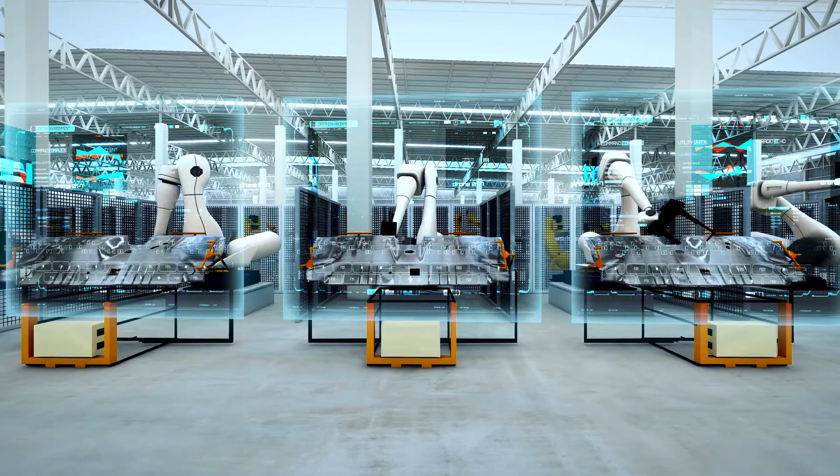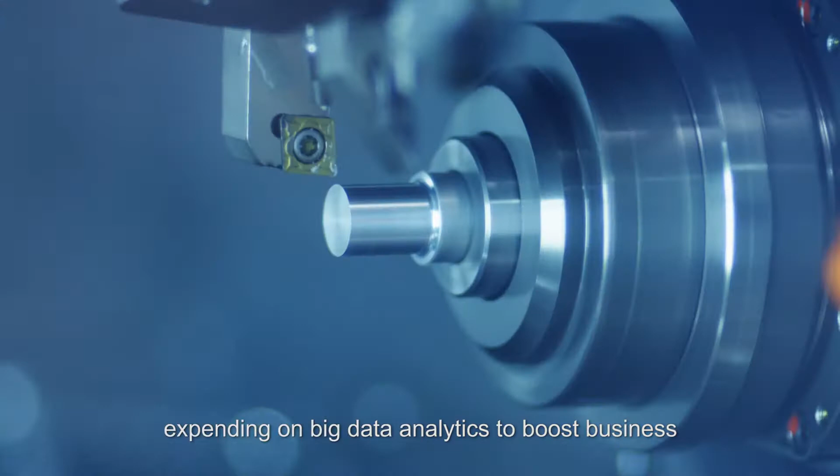Capturing factory production data through the cloud, utilizing predictive maintenance and instant error detection data to generate production models, expending on big data analytics to boost business through automatic adjustments to the production line, increasing yield rates and enabling energy optimization. Industry 4.0 is no longer a vision.

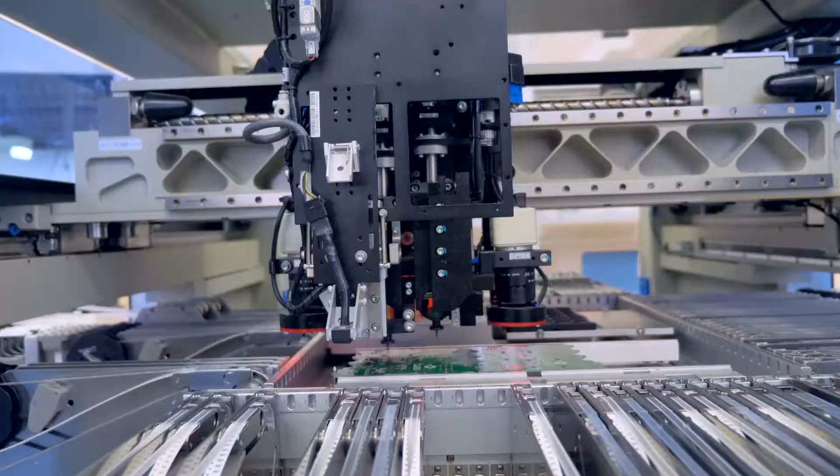It's already here, the new frontier for every tech firm. Committed to Industry 4.0, NEXCOM offers comprehensive solutions to capture data from robots, intelligent machines, and smart production lines. Collected data are aggregated at the edges for seamless integration with the cloud.

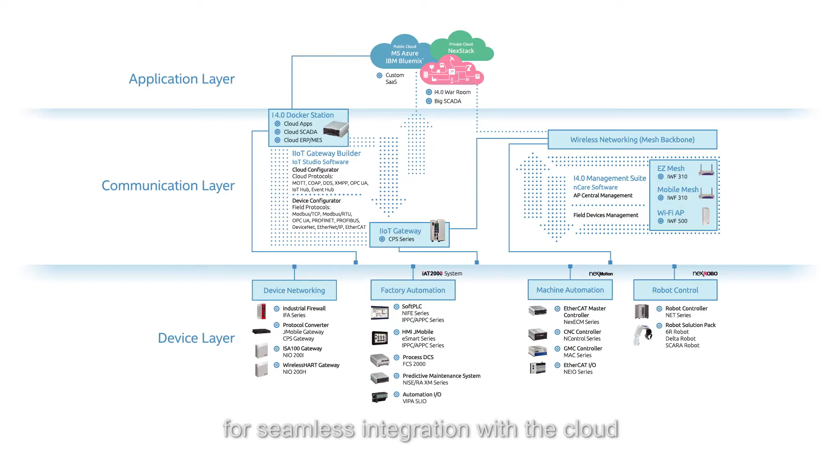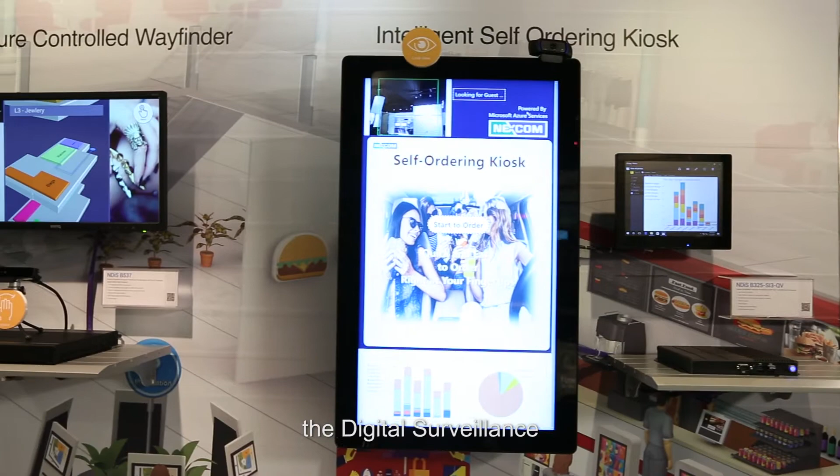NEXCOM was founded in 1992. Today, we have several business lines like the IoT automation solutions, the digital surveillance, the smart medical, the embedded platforms, the mobile computing, and last but not least, the network and communication solutions.

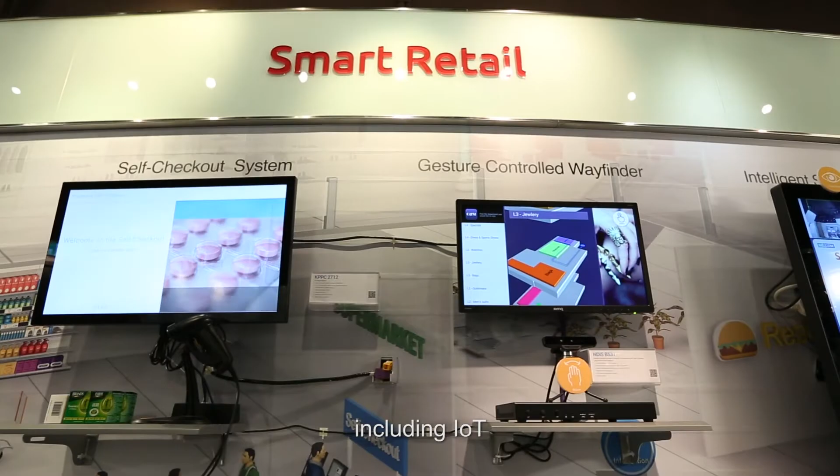All the hardware platforms are based on Intel architecture. Under the IoT megatrend, NEXCOM also expands the solutions to emerging applications including IoT, robot, connected cars, Industry 4.0, and industrial security.

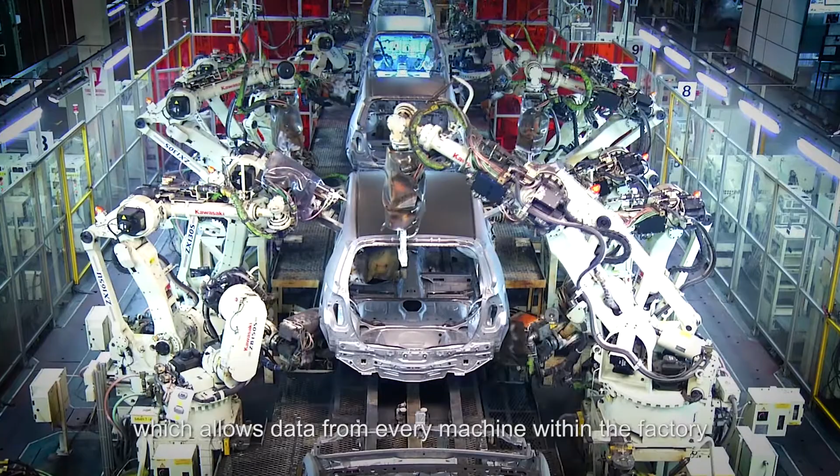The key factor to the success of any Industry 4.0 solution is the accessibility of Internet of Machine, which allows data from every machine within the factory to be collected.

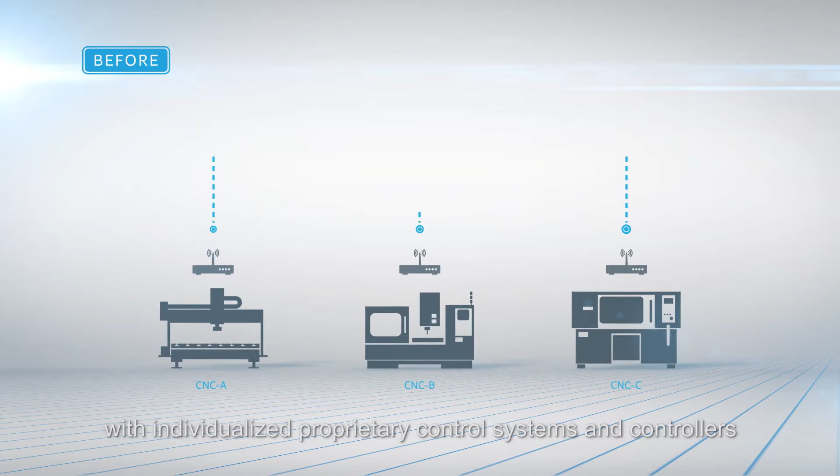In a traditional automated production line, machines vary in vendors, with individualized proprietary control systems and controllers. The differences in communication protocols prohibit direct communication between machines, making it difficult to capture equipment data and manage the system centrally.

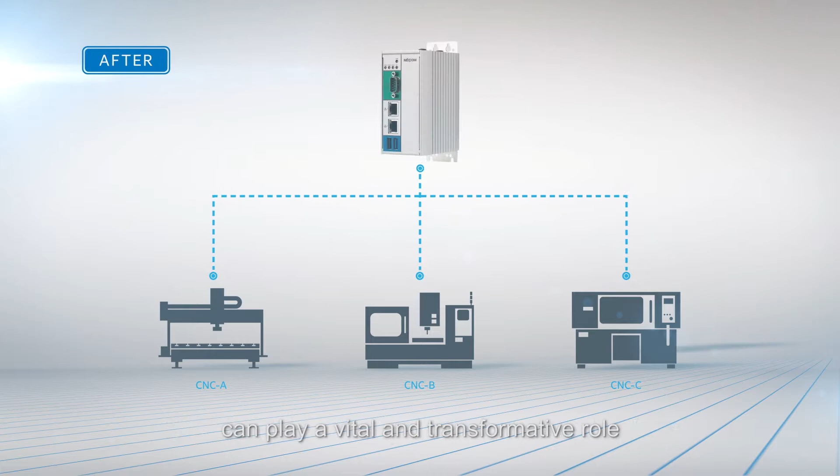For manufacturers seeking solutions to upgrade their production lines, NEXCOM's Ethernet-based EtherCAT technology can play a vital and transformative role. The smart gateways powered by Intel technology convert the languages of heterogeneous equipment into one common control language. This allows machines using different protocols to work in cohesion and effectively enhance production line efficiency.

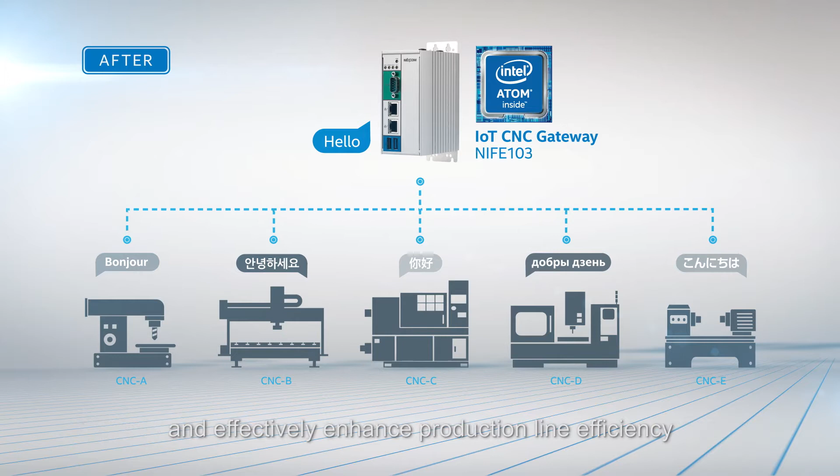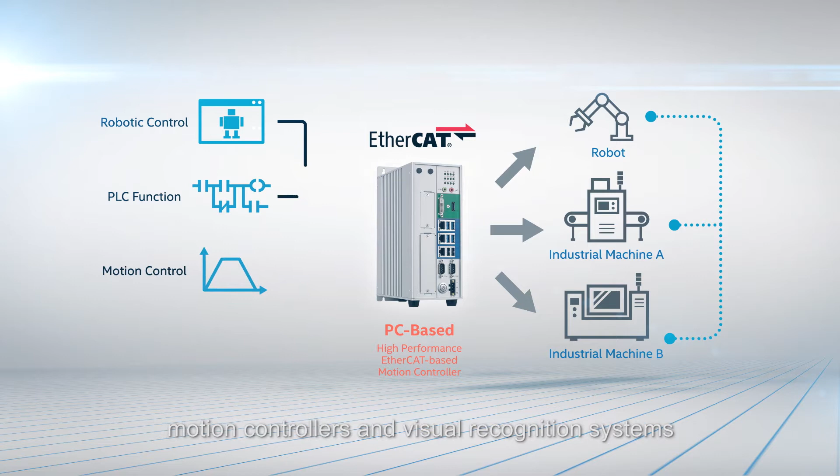For firms starting to build a smart production line from scratch, NEXCOM's highly flexible, PC-based smart controllers link and manage a wide range of equipment by integrating programming and data from robotic arms, programmable controllers, motion controllers, and visual recognition systems. This kind of advanced level integration is rare amongst controllers within the current market.

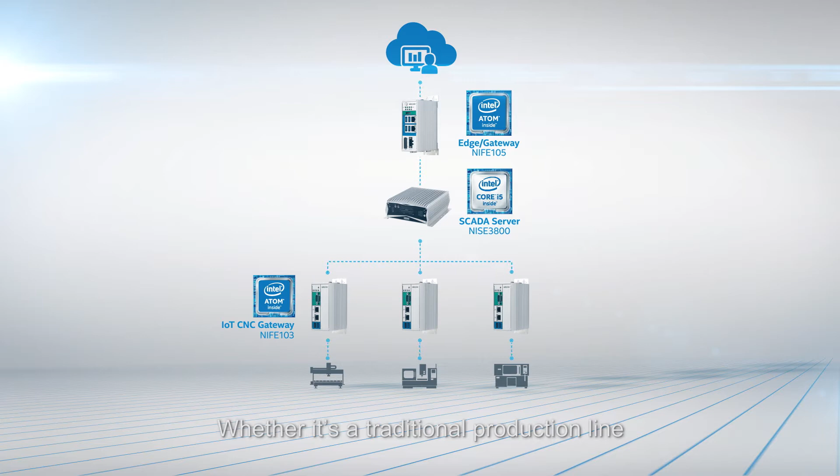Whether it's a traditional production line in dire need of upgrades or a newly implemented smart production line, you could always find the best solution at NEXCOM.

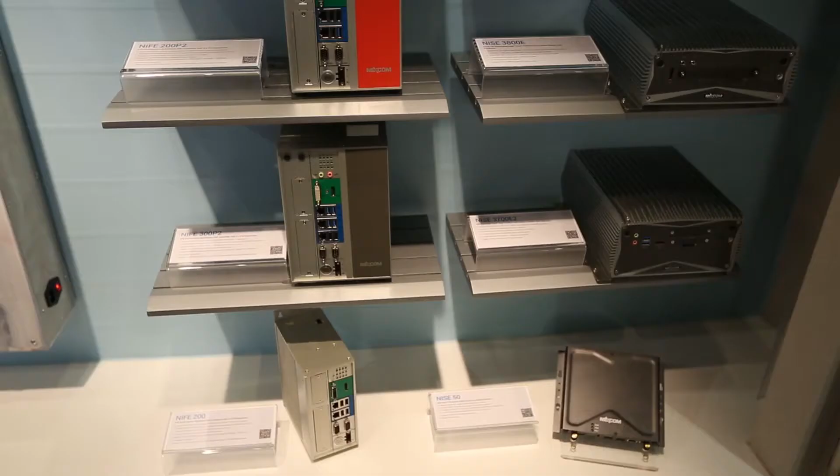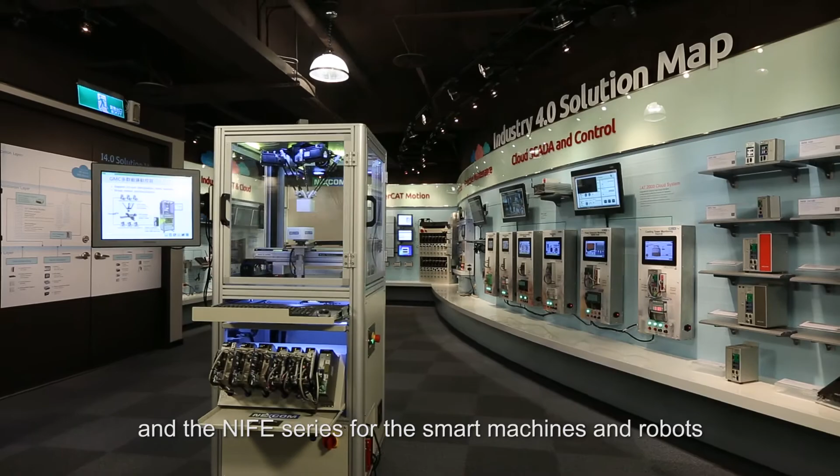We have several Intel Atom-based gateways like the NISE 50 and the Core i-based edge servers in the industrial IoT for best performance. We also have several Core i-based controllers like the NIFE 300 GMC and the NIFE series for smart machines and robots with real-time response.

All these systems are fan-less for ultra reliability. Intel processors are powerful, reliable, and energy efficient.

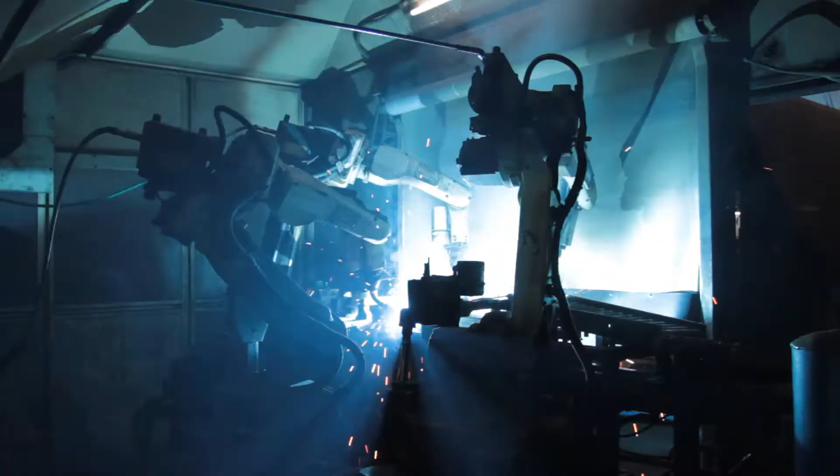Paired with NEXCOM's outstanding design and manufacturing capabilities, industry-leading gateways and controllers are created. In addition to being compliant with heavy industry regulations, they have a high level of tolerance to temperature changes, shocks, and interferences. Even in the most grueling manufacturing environments, they remain consistent and efficient to enable reliable Internet of Machines performance.

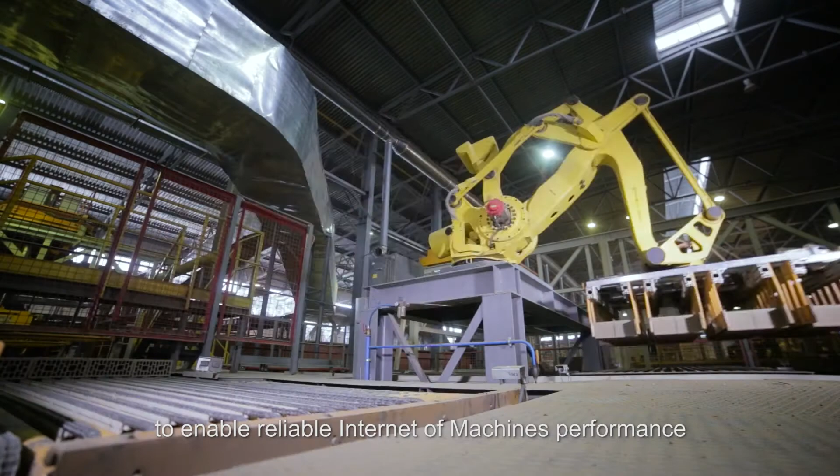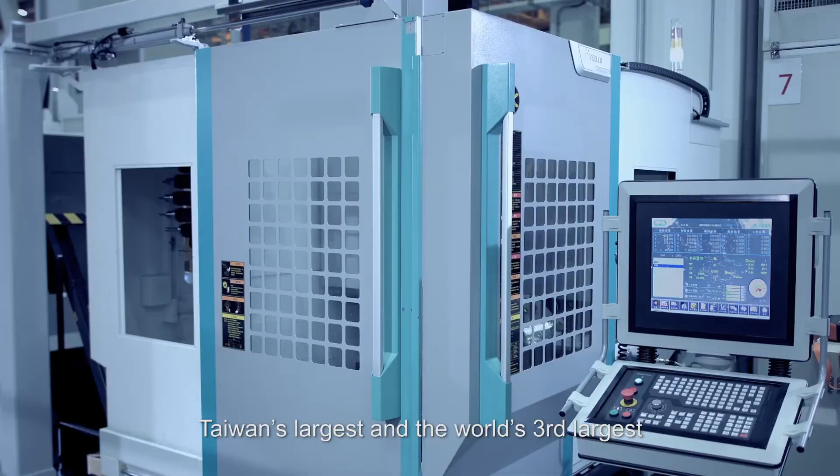Meanwhile, the intuitive dashboard provides managers with a centralized view of live updates of the factory floor. Jointly developed by NEXCOM and Intel, the smart manufacturing solution has been adopted by Fair Friend Group, Taiwan's largest and the world's third largest machine tool manufacturer.

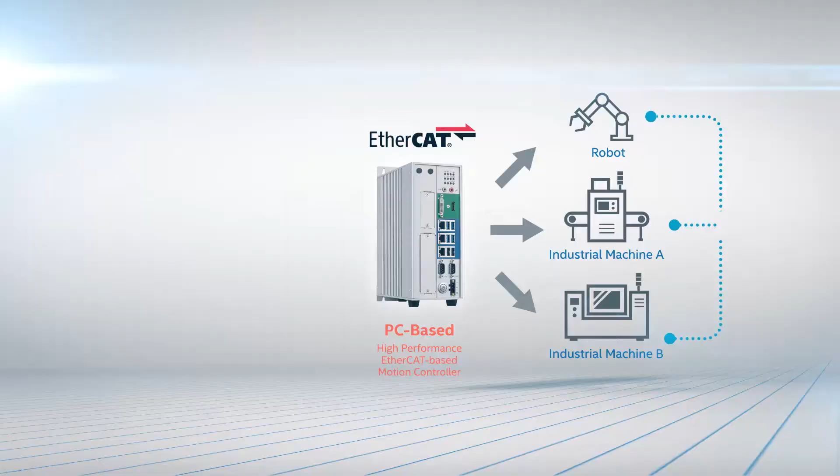By leveraging the solution to build more advanced connected machines, Fair Friend Group is enabling its global customers to optimize their production lines. The unification of various control systems with smart controllers simplifies the manufacturing infrastructure. With gateways to orchestrate communication protocols, effortless communication between smart machines is established.